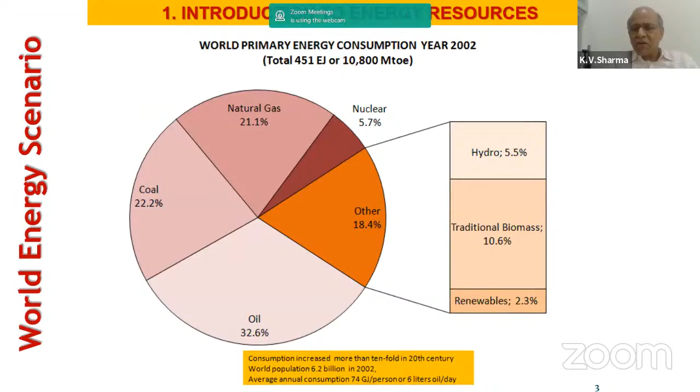The energy scenario of the world is something like this: in the total consumption pattern, renewables constitute about 2.3%, of which solar constitutes only 0.2% of world energy sources. So there is a lot of scope for the world to go in for solar, which we also know from the Government of India's plans to generate more energy from photovoltaic panels, converting solar energy into electricity.

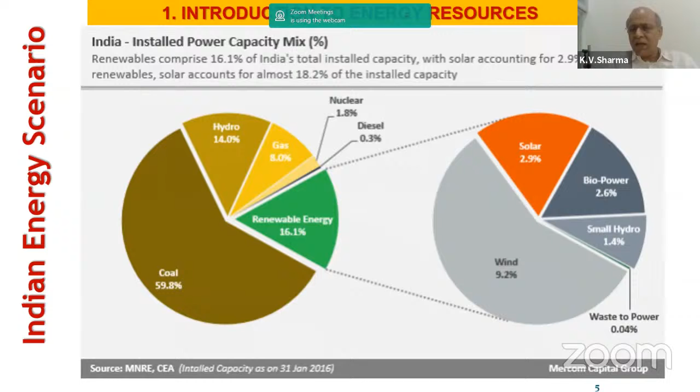Coming to India, the installed energy capacity is somewhat like this: about 60% is conventional thermal power plants, about 14% is hydro, gas constitutes about 8%, and renewables constitute about 16%, of which solar is just about 3%. So we can say that more solar energy is being utilized in India, as the renewable share from solar, about 3%, is more than that of the world.

We know the mechanism of energy conversion from the sun. The basic concept is that solar radiation falls on a simple structure called a flat plate. The energy passes through a glass cover and enters into a chamber where we have a surface, normally a good metallic surface, which absorbs the heat. That heat is transferred to the liquid flowing inside the tubes.

We see that the radiation falling enters, but from the law of heat transfer, this absorber plate, when its temperature is more than that of the ambient, naturally when it absorbs solar radiation, the plate temperature shoots up to about 100 degrees or so. Consequently there is a temperature potential between the absorber plate and the ambient, so energy is lost by the mechanisms called convection and radiation.

However, the glass plate prevents that. There is multiple reflection taking place so that more energy is absorbed by the plate and less energy is radiated back into the atmosphere. So this is an effective means by which we try to convert solar radiation into useful form.

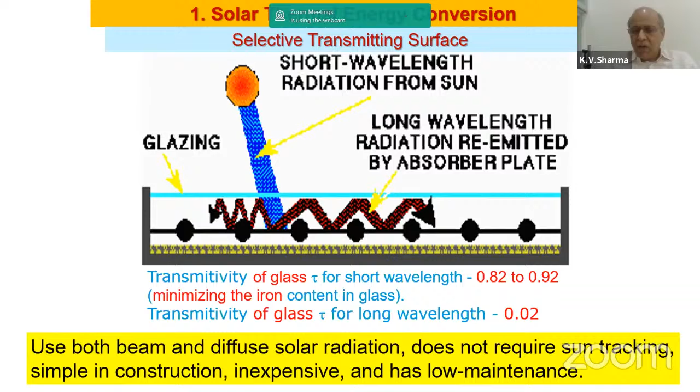So this is an important parameter which helps in the effective conversion of solar energy into heat. Further looking into the absorber plate, if it were just a copper plate, the absorptivity would be low and emissivity is also low.

However, when we go for certain special coatings on these absorber surfaces - most of us must have seen a flat plate collector, and it is generally black in color - if it is coated with lacquer, its absorptivity is very high. It has gone up from 0.05 to 0.95, so the absorptivity increases very high. However, the emissivity also radiates energy back into the atmosphere, which is not advantageous to us.

Now, when we go for black chrome, absorptivity is very high and emissivity is about 12%. But when we go for chemical vapor deposition or physical vapor deposition, PVD or CVD method of coating an absorber surface, absorptivity is very high, of the order of about 95%, and emissivity is as low as 0.05. So most flat plate collectors have such coating which helps enhance the efficiency of a flat plate collector.

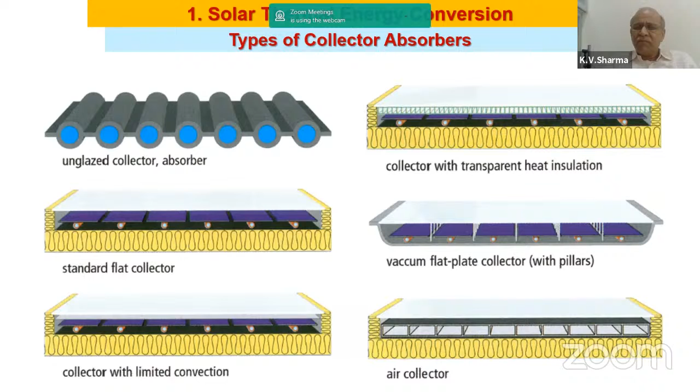As you can see here, the tube and the absorber plate are in line, but it can also be below the absorber plate. So there are various designs which people have been working with in order to see how best we can convert solar radiation into useful energy.

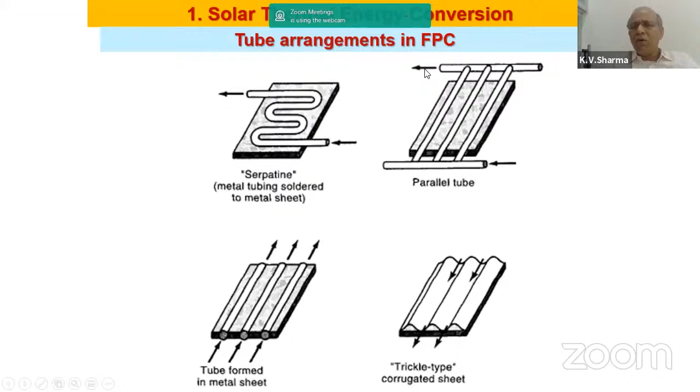So there are various designs for the tube arrangements, but normally we go in for the second type. This type is very common. We have the inlet header, the tubes rising or risers, and the outlet header. So this is the basic structure.

This is normally called the thermosiphon effect. Most of the domestic water heating systems come under this category.

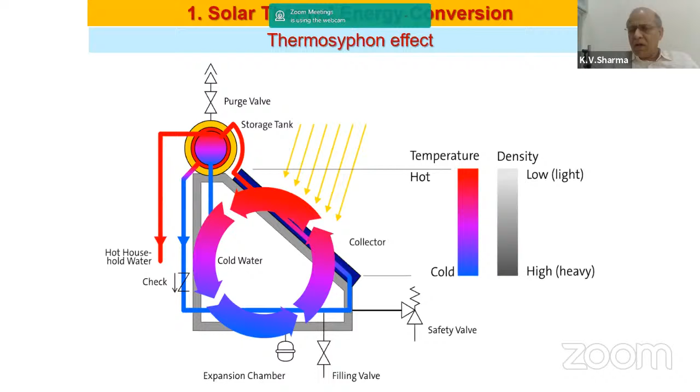So we connect it to a storage tank, and there is a continuous flow of water in such a system. This is very commonly used at homes or in colleges, because it is cheap, it doesn't require any external pump, and it doesn't require much maintenance. Hence we go in for a kind of thermosiphon system.

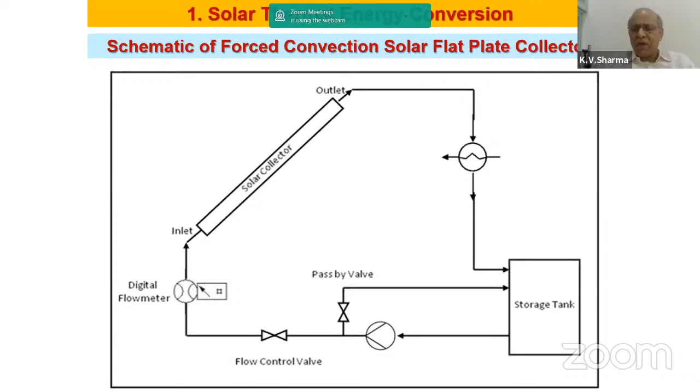So there is another type which we call an evacuated tube collector. An evacuated tube collector is a double glass layer. Between the two glass layers, as we have seen in the earlier figure, there is a gap, and this gap is not evacuated in the case of a flat plate collector. Consequently, the convection losses in a flat plate collector are as high as 13%.

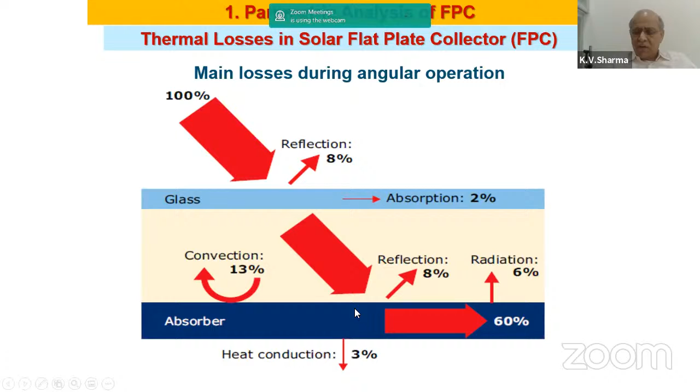However, in the case of an evacuated tube, there is a gap between the two glasses, and air is extracted, or there is vacuum between the two glass covers. Consequently, the convective loss will be minimized, and hence the efficiency of an evacuated tube collector will be higher than that of the flat plate collector. So how do we extract energy from an evacuated tube?

It has to generally be by forced circulation, because water cannot just enter a tube like this with so many bends and so many glass evacuated tubes. Consequently, we have a pump which will pump the water, generally water, into these tubes and take out the heat.

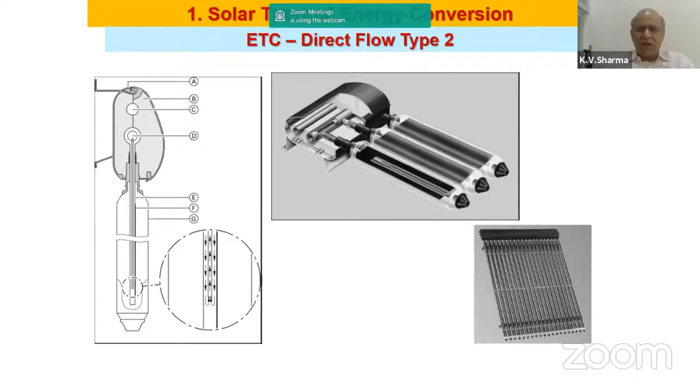So here's one more cross section, a figure which helps you understand what it is. This is an expanded view I could have shown. This is the working fluid. The cold fluid comes, absorbs the heat, becomes hot, and transfers it to the working fluid as shown here.

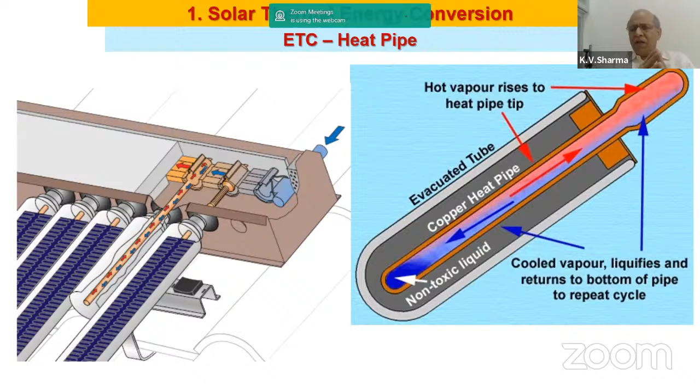There are different designs here. You can have a finned structure to this heat pipe for efficient conversion of energy. After all, our designs are meant to see how best we can convert solar radiation into useful energy.

Another type, so we have the vacuum tube, with vacuum between the two glass covers. So we have a tube which transfers it. These are just to show you that there are a large number of designs.

The difference here is that you have a metallic part, as shown here, two metallic parts, and the tubes, so that there is a transfer of energy. This is a kind of absorber plate, and this is the tube, transferring the basic concepts from a flat plate collector to an evacuated tube.

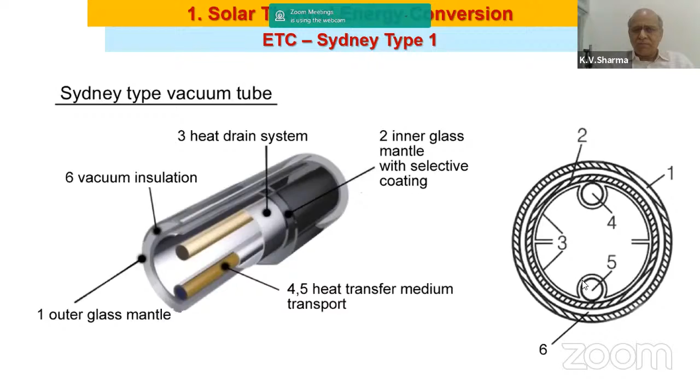Various designs as you can see here. The tube is integral with this. The liquid enters, takes the heat, and then comes out as shown here. There are different types of evacuated tubes. Here is one more, a copper tube as you can see. It can be integral, or it can be two different pieces so that it can be handled easily.

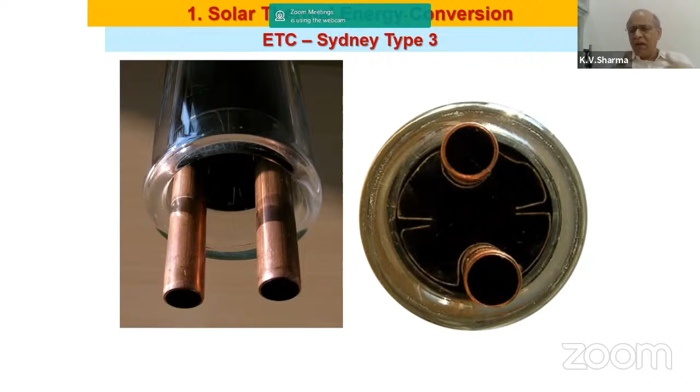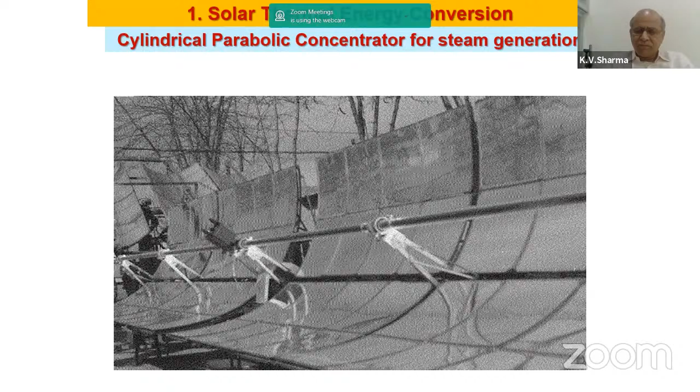So you also have, a flat plate collector is generally fixed in orientation.

However, there are other continuous tracking mechanisms in order to see that there is efficient incidence of solar radiation on the absorber plate. Normally, in the morning, or at one point when the flat plate collector is inclined, there is a perpendicular direction in which the solar radiation falls on it. But as the sun traverses, the radiation falling on this absorber plate changes angle, and hence less amount of energy is incident on it.

But if you are able to continuously move the collector, the flat plate collector or any solar energy conversion device, then the energy absorption or the energy incident on the collector will be maximum. To ensure it is maximum, we have to see that the solar radiation falls on the collector in a perpendicular direction all the time. If we are able to move it, then it is the best. Such a system is this tracking mechanism.

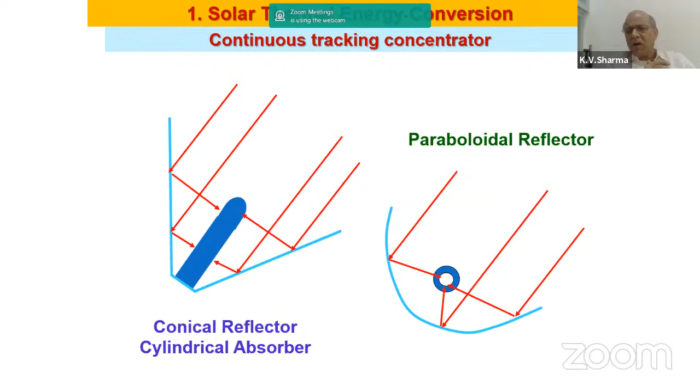There are tracking mechanisms and algorithms which will aid in continuous tracking of the sun each and every day of the year. In fact, we can write programs based on the sun-earth geometry. There are various methods of tracking it or writing such a program, but it is a different area which we are not going into further.

There is also what is called a dish type concentrator, where at the focal point we can have a cooker. I can take such a system and keep it in the sun. At this location, I can keep a cooker so as to cook food. Such systems are also available in India, and you can use it for various applications depending upon your objective.

Now we have seen different types of collectors. We initially saw a flat plate collector in detail, then the evacuated tube collector, which is also very common now. These are of different sizes, and depending upon the size, we can design the internal absorber design as we would like. We have also seen a dish type, and concentrators of different shapes, cylindrical, parabolic concentrator, and so on and so forth.

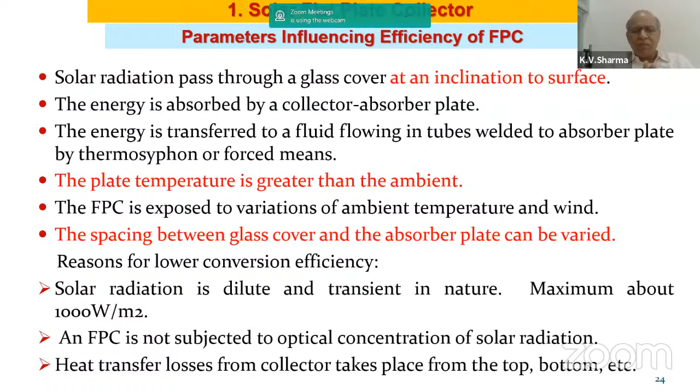Because we are having flat plate collectors on the surface of the Earth, probably we can take 1000 watt per meter square as the maximum heat flux.

Our objective is, as we see here, the flat plate collector efficiency as shown earlier in the figure is about 60%, so it varies generally between 30 to 60%. Naturally, as engineers, we would like to see how best we can enhance this efficiency.

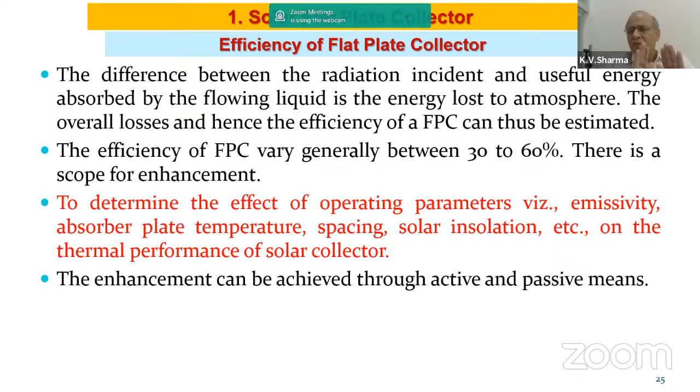The efficiency of an evacuated tube collector generally lies at about 80%. So there is still a certain possibility for enhancement of the efficiency of an evacuated tube collector also. For today's presentation, I would like to limit myself to the analysis of a flat plate collector.

As stated, we have selective coatings on the absorber plate, which has high absorptance of about 0.95, low emittance of about 0.05. We have the option to go for a single cover, which is normally what we have in the market, or we can also increase the number of covers to 2.

The spacing between the absorber plate and the glass cover can be varied. However, the Ministry of New and Renewable Energy has given certain guidelines, which is about 2.5 cm or 25 mm.

So if we can think of having 2 glass covers, the losses will decrease. On one side, the losses decrease, and on the other side, the solar insolation or the energy passing through the 2 glass covers and reaching the absorber plate decreases. So there is a trade-off between the amount of energy entering and the amount of energy leaving as losses if we were to have more number of covers.

Also, the gap between the absorber plate and the glass cover can be varied. Tilt is another thing, or slope, as we call it. This also varies. In summers we would like to have it as flat as possible, as horizontal as possible. In winter we would like to have an inclination.

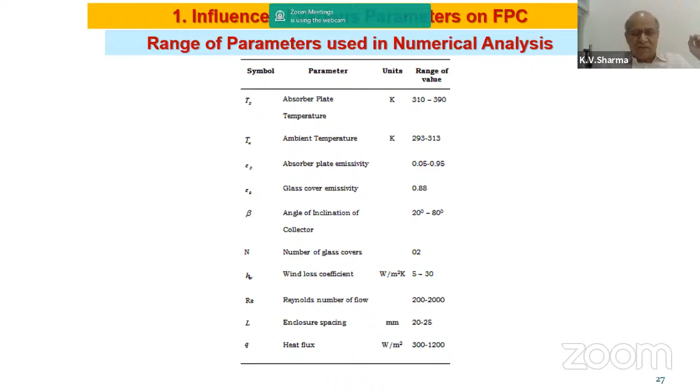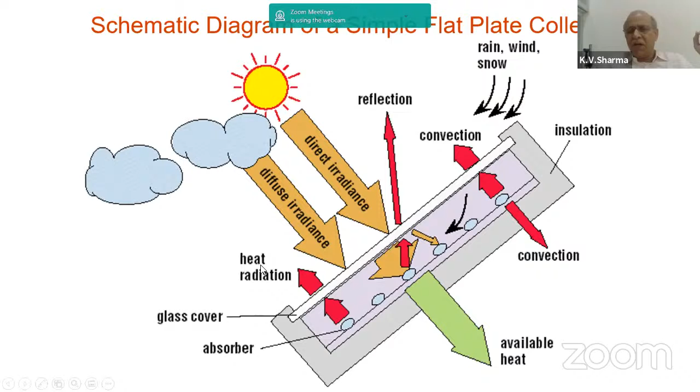So this is the program that has been written in Fortran.

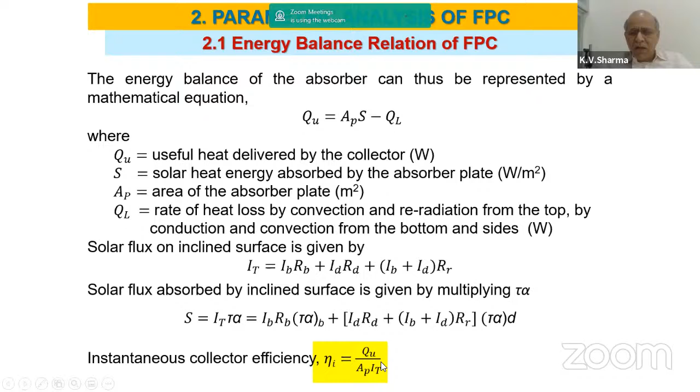The basic energy balance is quite simple. The useful energy is equal to the amount of energy absorbed by the plate minus the losses. So if I can minimize the losses, I can enhance the useful energy and consequently the efficiency of the system. That is the objective, and this we observe.

Without going much into this, I would like to dwell upon the results from the numerical program that we have. We have what is called the wind heat transfer coefficient due to wind. I have varied the wind heat transfer coefficient between these two, and I have kept the glass emissivity constant as shown earlier. The plate emissivity is 0.05, meaning it is a very efficient system, a very good value.

The slope beta is 20 degrees. The number of glass covers is 1. The ambient temperature is 303 Kelvin. Since we are dealing with radiation, I have the temperature always in absolute temperature scale.

I have varied the absorber plate temperature. If the distance between the absorber plate and the glass cover is 0.025, I varied the plate temperature and was able to get the glass cover temperature by running the program. We see that if the space is 2.5 centimeters, it is lower compared to 5 centimeters.

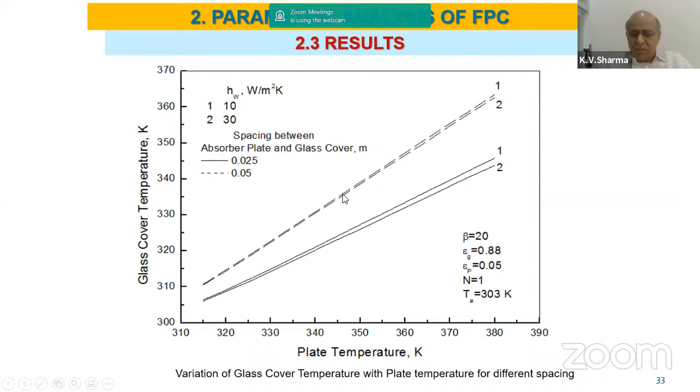It is once again a similar one. I have the absorber plate temperature here and the glass cover temperature here. The absorber plate temperature will always be higher than the glass cover temperature. I have shown it for two emissivities: 0.1 and 0.95. Naturally, if the emissivity is low, the losses from the top, which we call the top loss coefficient, are very low. Generally, the loss coefficient varies from about 3 to 3.5.

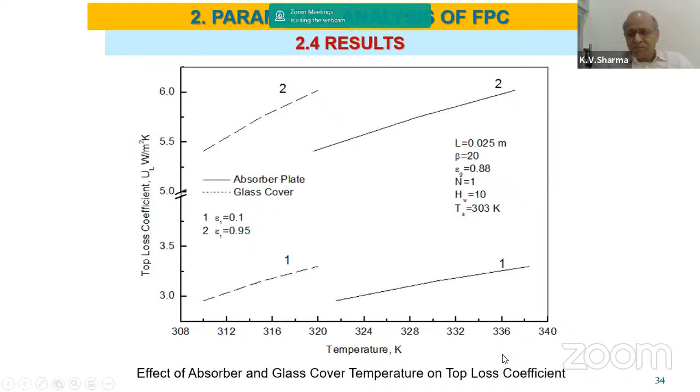However, if the plate temperature varies—if the plate temperature is low, the top loss coefficient is low. If the plate temperature is high, the potential between the plate and the ambient increases, and consequently the losses also increase.

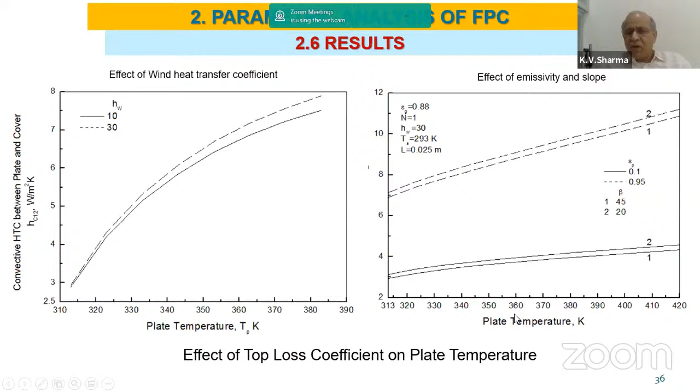Here I show the effect of emissivity. I don't know whether you are able to see it, but like this, we do a large number of parameters.

Here, the emissivity of the plate—if the emissivity varies from 0.1 to 0.9, we see that the top loss coefficient increases from 3.5 to 6, almost coming to double.

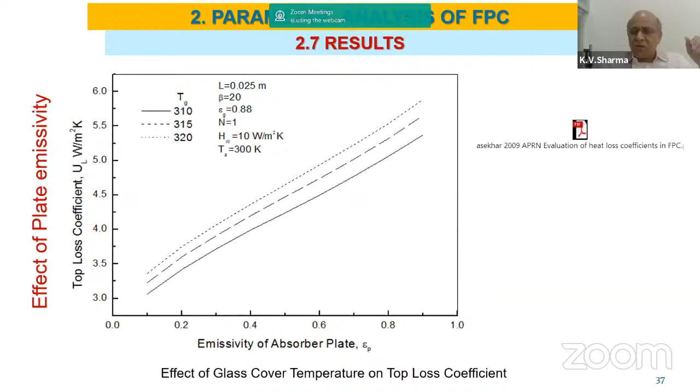So this is, what is the impact of the plate emissivity on the top loss coefficient? When I do a particular analysis, it is quite evident whether my program is correct or not. I am getting some results, but I do not know whether my program is reflecting the true nature of a collector, so for which I have taken the experimental data of one of the authors available in the literature.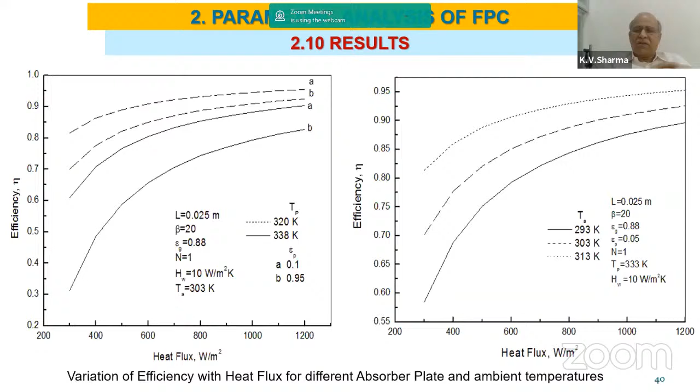Here also I have the effect of ambient temperature on the performance. Then, with the tilt angle, how the efficiency varies. As we have seen earlier, the effect of tilt angle is not that significant. However, when the heat flux increases, the efficiency is found to increase.

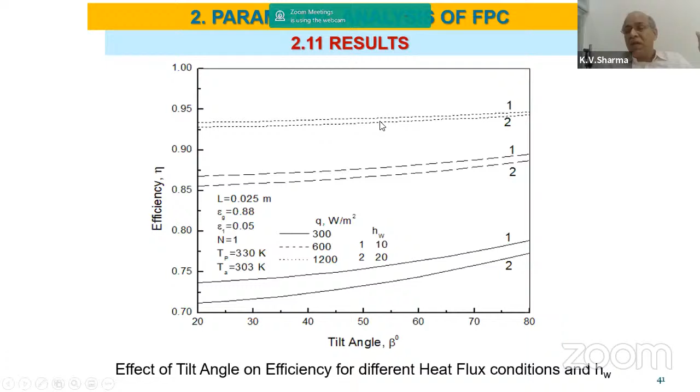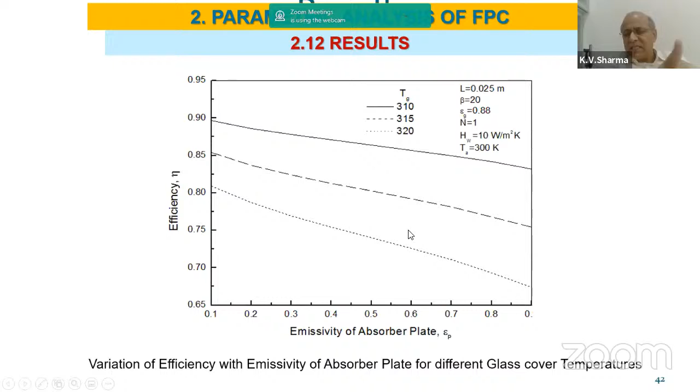Once again, the emissivity of the absorber plate. For different emissivities I have plotted, when I change the glass temperature on top, if the glass temperature is low, the efficiency is high. If the glass temperature is high, the efficiency comes down. This is how it is varying for different emissivities of the absorber plate.

So why is the plate temperature increasing? It is increasing because we are not able to extract the energy absorbed by the absorber plate and transfer it to the working fluid, water. If we don't extract it, naturally the plate temperature increases. So how do we reduce the plate temperature, the absorber plate temperature, in a flat plate collector? That is the objective with which we will move into the second part of our discussion, which we call nanofluids.

Normally, the working fluid that we use is water. Water is cheap and commonly used to extract heat. In certain applications, we also have ethylene glycol, engine oil, and so on, depending upon the nature of application. These are used to extract heat or transfer heat from one surface to another.

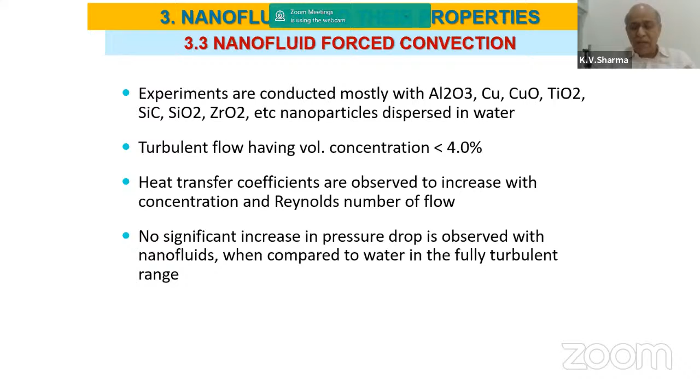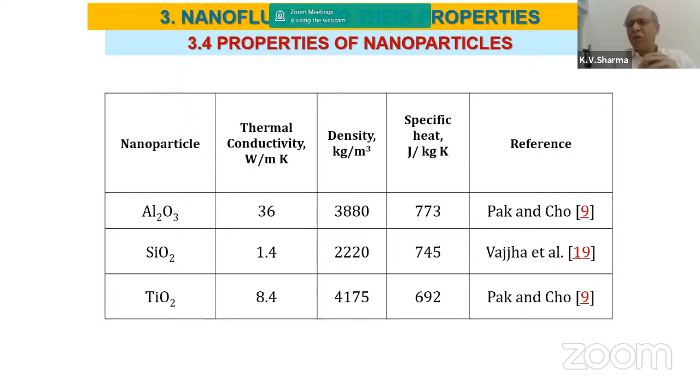So various people have done it, and these are some of the properties that we can make use of. For today's presentation, I would like to dwell upon basically TiO2, titanium, and silica. These are the two nanoparticles with which these people have worked, and they have given the properties.

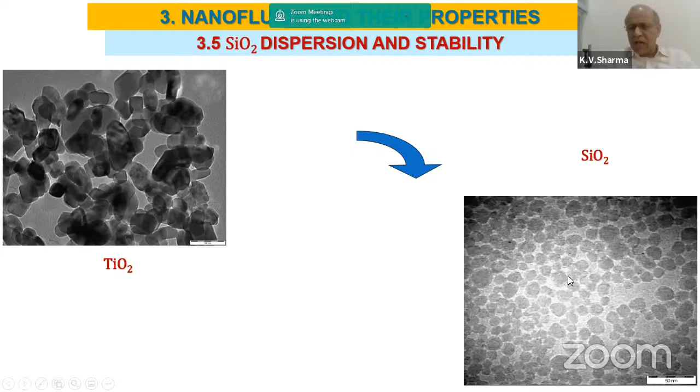So this one is of TiO2 and this one is of SiO2. For silica, to get the image is difficult, and hence we have it in this manner.

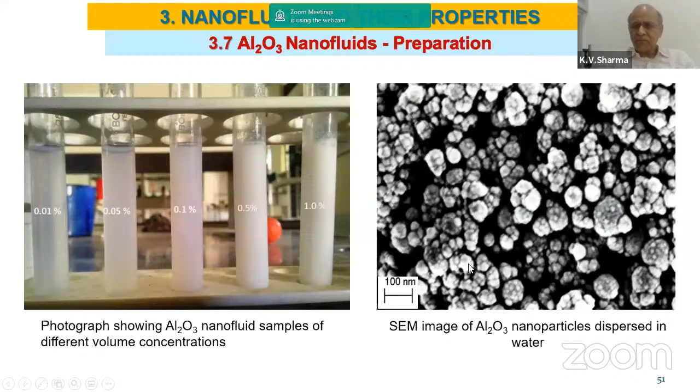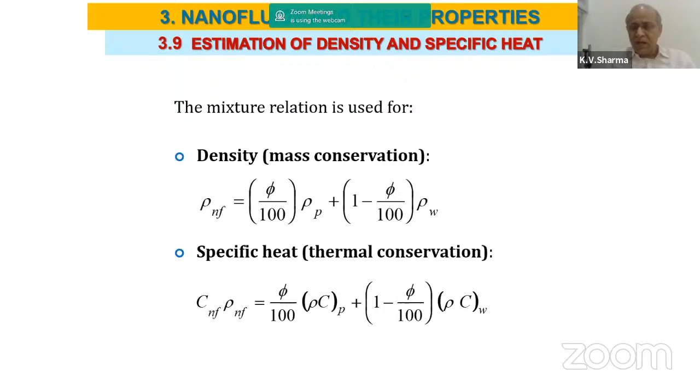But however, when we come to the thermal conductivity of nanofluids, we have to conduct a large number of experiments. Various people have conducted experiments and presented the properties in journals.

Yes. Any question being asked? Okay.

So I have taken a large amount of data which has been presented by various authors working with different materials, different particle sizes, different operating temperatures, different concentrations. So I can vary the concentration, I can vary the temperature, I can vary the particle size, I can vary the material. There are 4 parameters involved when we try to determine the thermal conductivity.

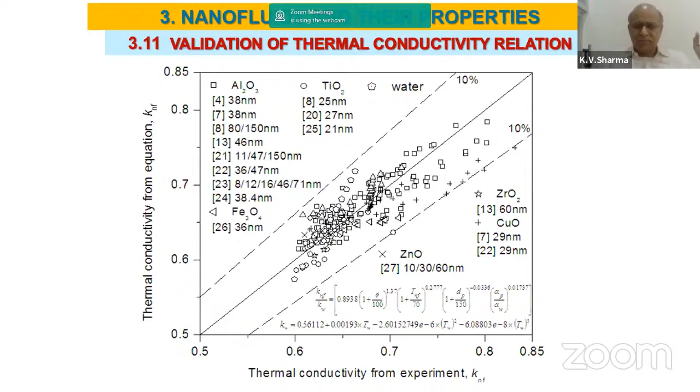I have made use of the Brookfield viscometer and determined the viscosity. That data from a large number of people has been subjected to regression. Once again, as concentration increases, viscosity increases. As we know, concentration is proportional to the amount of nanoparticles in the liquid, so as it increases, viscosity increases.

As the temperature increases, viscosity decreases. We know that viscosity decreases with temperature. Rightly, the negative sign reflects that. So I can say that this equation reflects the true nature of viscosity.

And if the particle size increases, the viscosity decreases. So for a particular concentration, if the particle size increases, the number of particles will be lower, and hence viscosity decreases. This equation is valid for all nanofluids, where C has a value of 1, but only for SiC, silicon carbide, it is found to be 1.4. So please note that this equation can be used only for water-based nanofluids, not for all.

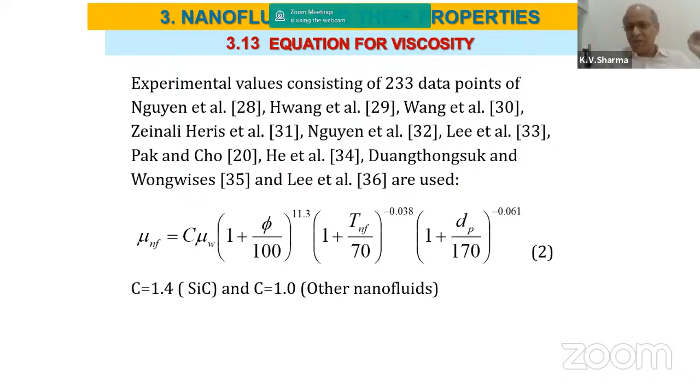So once again, checking the reliability of the equation, which we call the parity graph, same axis on x and y for the same scale. When we plot it, we see that the deviation is within about 10%.

Now I have with me all the properties that are required. Making use of the properties, I determine the objective. What is the objective we have here? To know what is its impact on the surface temperature. If I were to have water, what will be the surface temperature? If I make use of a nanofluid, how will the surface temperature be? Is it going to increase? Is it going to decrease?

Rightly, we can say that since the thermal conductivity of a nanofluid increases, we expect the absorber plate temperature to decrease as we have nanofluid flowing through these tubes. Let us see how much it is, what parameters it depends on. Let us go in detail a bit.

There are other ways also to enhance the heat flow. One is what is called a twisted tape. I have a tube through which I can allow the liquid, either water or nanofluid, to flow through. Also, I can have a twisted tape. So I have a tape, a strip, on the lathe at equal intervals, and I make a twist of 180 degrees. Thereby, we call this a twisted tape.

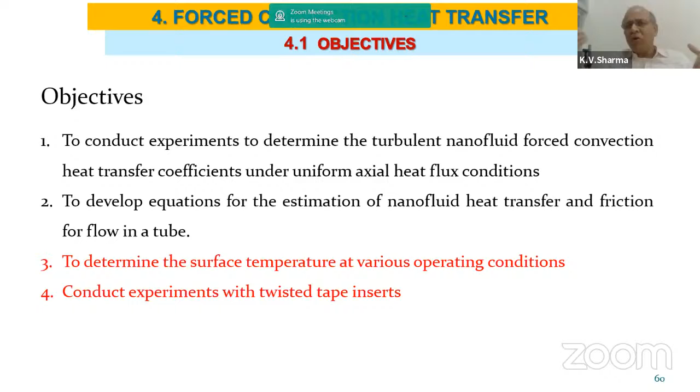So I take this tape and insert it into the tube, by which I will be able to enhance the heat transfer coefficient. If the heat transfer coefficient increases, we know that more energy is transferred to the fluid, and consequently the wall temperature can decrease.

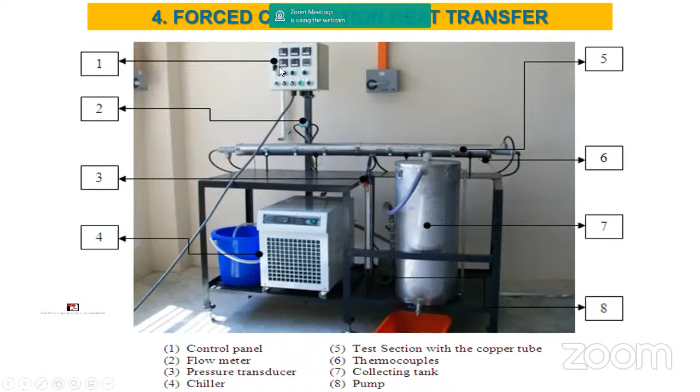So I have the experimental setup. There is a facility for me to remove this part and insert the twisted tape inside the tube for this length. I have a chiller, a storage tank, and this constitutes the setup. I have equipment to determine the pressure drop across the length of the tube, and I also have thermocouples here, which are all sent to a data logger.

So I have a console which will show me the pressure drop and the temperatures at different locations. Also, I have a thermocouple measuring the inlet and outlet temperature. So this is an experimental setup. You can either make use of this, or in your college you should be having a double pipe heat exchanger or U-tube heat exchanger, so you can also convert such experiments making use of this technology.

In fact, a PhD work is going on making use of something simple, we need not go for very complicated setups. You have to understand the physics of the problem, make an energy balance, and then equate it. So getting a PhD by doing experiments, only thing is you need patience, clarity of understanding, and you need to conduct the experiment by spending a large amount of time. Then you get wonderful work wherever you are.

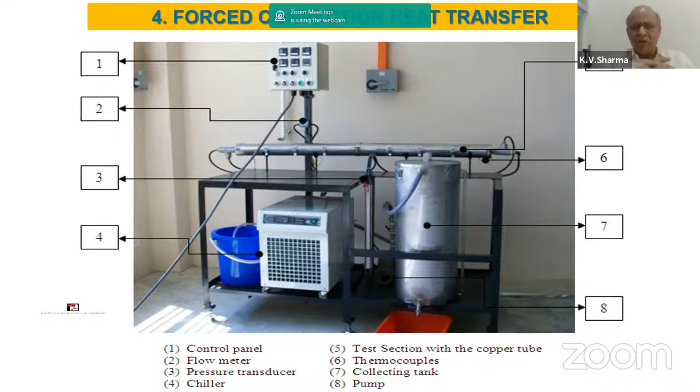So here is a schematic diagram, this is what I call a twisted tape, and this tape can be inserted inside here, inside the copper tube, over which I have insulation. This is a forced convection apparatus, I need not call it very specific. Only thing is I have temperature indicators and sophisticated instrumentation, which enhances the cost of the experimental setup.

So these are the parameters. I have given 600 watts. I can control the average temperature of the fluid at the inlet and outlet to about 30 degrees centigrade with a deviation of about 1 degree centigrade. So that facility, temperature setting, you can set the temperature and then run the experiment. I also have a data logger which will measure the surface and fluid temperatures every 5 seconds and store the data so that I can know whether the system has come to steady state or not.

So these are some of the parameters that I measure: flow rate of the working fluid, pressure drop across the length, and the temperatures, including the inlet and outlet temperature, for the estimation of energy balance.

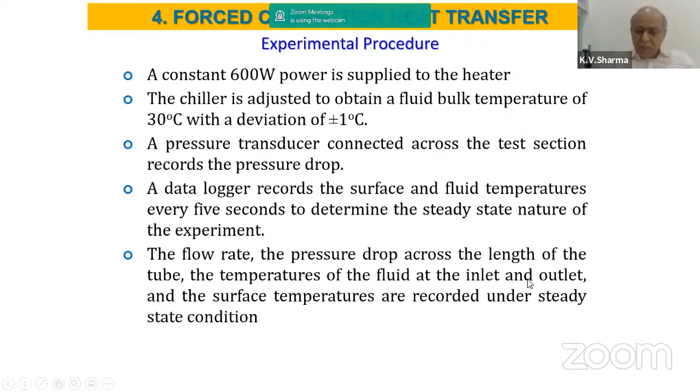This study involves simply 4 equations, which all of you are aware of. I am using electrical energy to heat the working fluid. I know from Newton's law of cooling that this is the energy by which I can estimate the heat transfer coefficient experimentally. I also know a non-dimensional parameter called the Nusselt number, which is defined in this way. I can measure the friction factor using the pressure drop from this equation, which we call Darcy's equation.

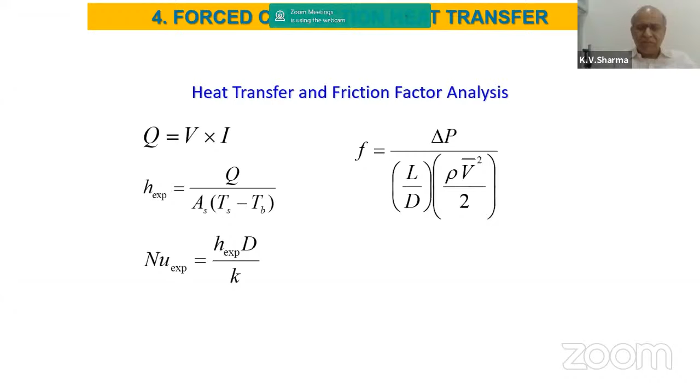So I conducted it with water to see the reliability of the experimental setup. I find that it is in good agreement with the various equations available in literature in the turbulent range of Reynolds number. For turbulent range, since I conducted in that range, I have made use of this equation. If it were laminar range, naturally you have to make use of 64 by Re as the equation, depending upon the range.

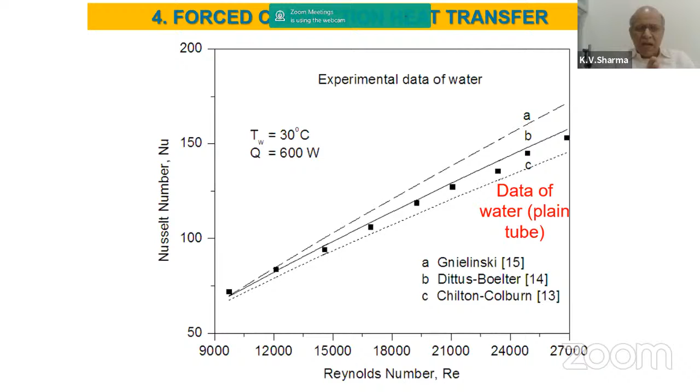Then I try to analyze making use of the data. I have increased the concentration from 0.5 to 3%, and also shown the base liquid. These dark squares represent water, and as I increase the concentration, I see that it is increasing up to 1%, but as I go to 1.5%, it has come down. Please note that I have done all these experiments at the bulk temperature, or average temperature, of the nanofluid set at 30 degrees centigrade. So if the average temperature of the working fluid is 30, this is the outcome.

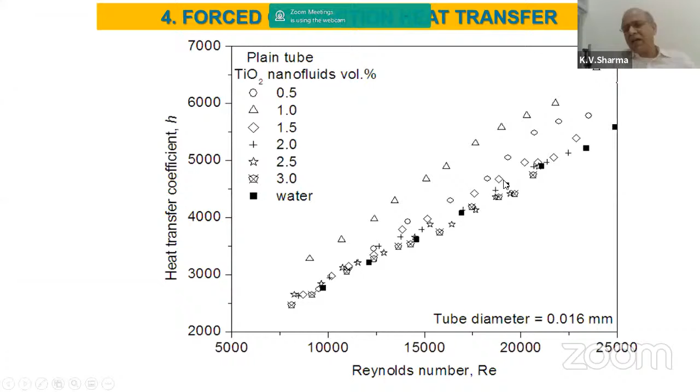Normally, we have a feeling that if I go on adding nanoparticles, as concentration increases, heat transfer will keep increasing. No, it is not the case. It also depends upon the working fluid temperature. In this case, at 30 degrees, you see that 1% concentration of TiO2 has given higher, or the maximum, heat transfer when compared to higher concentrations of 2, 3, up to 3%.

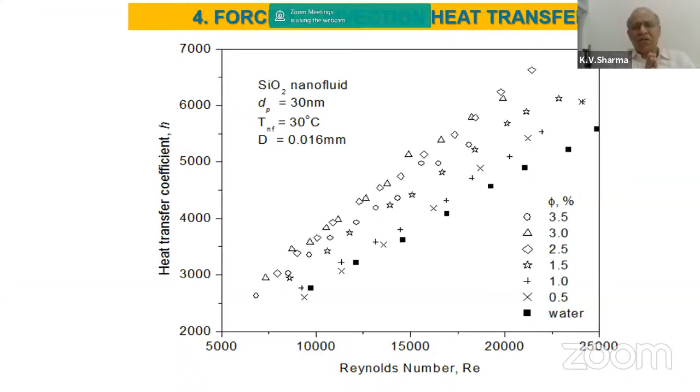Coming to SiO2, in a similar way, when I increase it from 0.5 up to 3%, the 3% concentration, shown by triangles, gives the maximum heat transfer coefficient. So once again at the same temperature of 30 degrees centigrade, when I change to SiO2, the 3% concentration shows the heat transfer coefficient to be maximum. For TiO2, it is 1%. For SiO2, it is 3%.

For turbulent flow, the property enhancement ratio is defined as the enhancement in viscosity ratio to the enhancement in thermal conductivity ratio. If it is less than 5, enhancements in heat transfer take place. But if it is more than 5, it is not advantageous for us to go for higher concentrations, since it depends upon the working temperature of the fluid. In this case, it is 30.

So some more plots for 0.5%, showing the same thing in a comparative manner. For 0.5% concentration, I have now shown for TiO2 and SiO2.

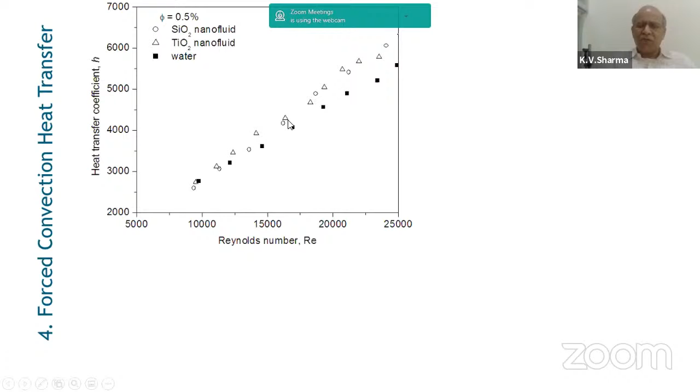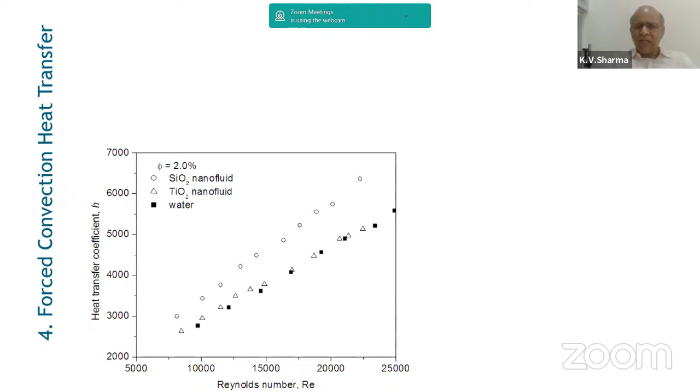When I go for 1%, TiO2 has come to a maximum, whereas SiO2 is still trying to go up. But when I go for 2%, now SiO2 has come up, circles. When I come to 3%, SiO2 has reached its maximum, whereas TiO2 is very close to that of water.

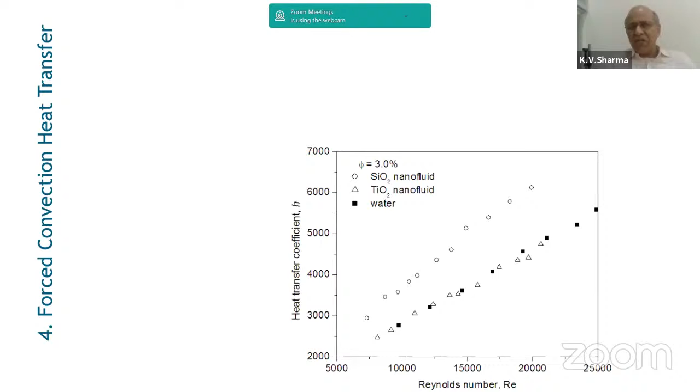So it is not advantageous always to go on adding nanoparticles or increasing the concentration just like that. We have to have clarity as to why we are adding, when we should add, up to what conditions this heat transfer gets enhanced.

Similarly, for TiO2, we see that at 1%, it gets a maximum enhancement of about 24%, whereas SiO2 at 3% gives a maximum enhancement of 33%.

Now coming to twisted tape, we know what a twisted tape looks like. All of you can manufacture twisted tapes in the workshop. Take a small aluminum strip of width equal to the inner diameter of the tube with which you are working, with thickness not more than 1 mm.

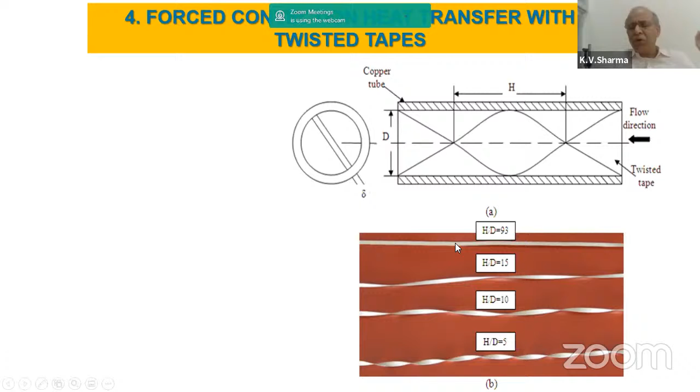This makes it easy for you to twist it and get twist ratios of 5. If the twist ratio is small, it looks like this. If the twist ratio is large, it will be something like a flat strip, close to that of a plain tube flow. So when I have it, I insert it here and get the results.

So I compare it with water for different twist ratios. This is in a plain tube and this is in twisted tape.

Now I go for TiO2, and the reason why I have shown this figure is that normally when we do something, we have to compare with the equations available in the literature to show the validity of our experimental data. If it doesn't come into that, then the reliability of the experimental data is questionable.

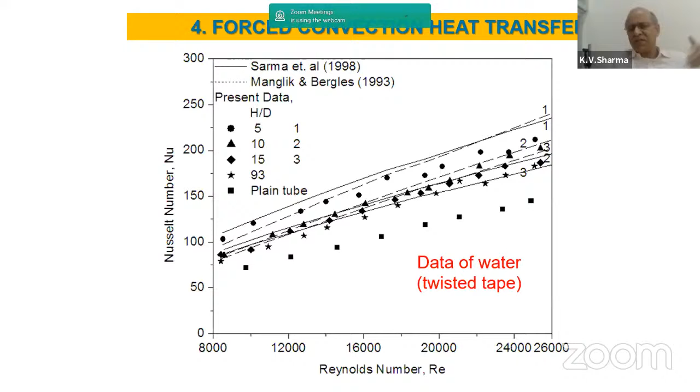So for water, after doing it and finding that it is in good agreement with two different equations, now I have reliability in my experimental data with nanofluid.

Similarly, I conduct it for various flow rates for TiO2 at 1.5%, for different H by D ratio.

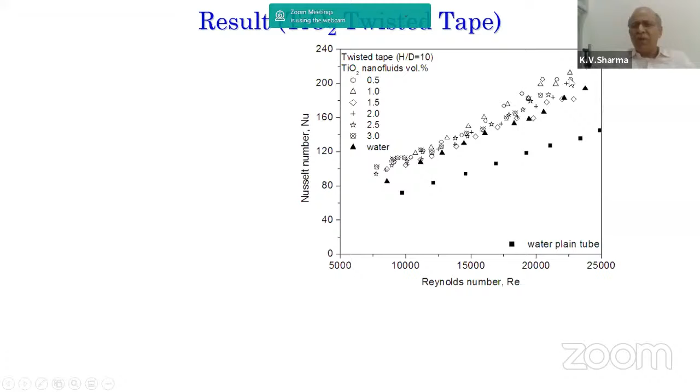When twist ratio has been increased to 10, the spacing increases and consequently heat transfer coefficient decreases. So the values have come down a bit when compared to the earlier one.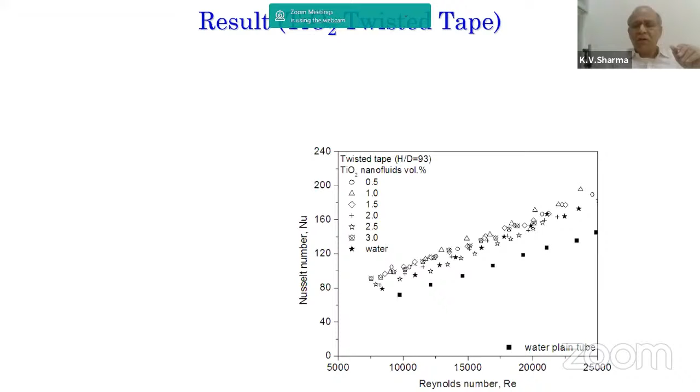So when it goes to 93, that means I have just introduced a strip which doesn't allow the water to get churned, and the water just flows like that. However, there is still a strip, so you have the heat transfer coefficients coming further down.

So like this, we start analyzing to see how best we can reduce the temperature of a flat plate collector.

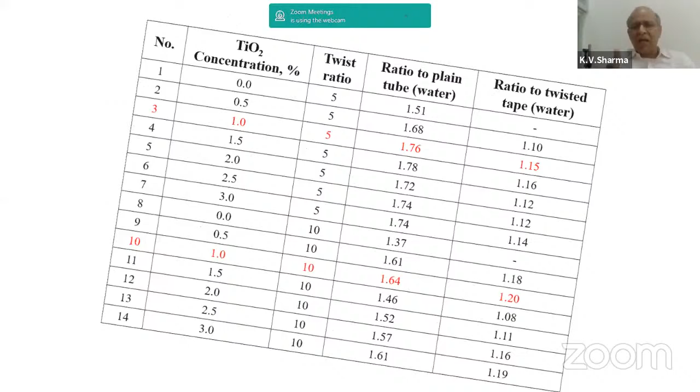So doing a similar analysis, just as we have done it for a plain tube, we can go for a twisted tape. We find that with the twisted tape, for TiO2 at 1% concentration, with the twist ratio of 5, the enhancement is 76%.

However, for the same concentration, when the twist ratio is increased from 5 to 10, the enhancement has come down to 64%.

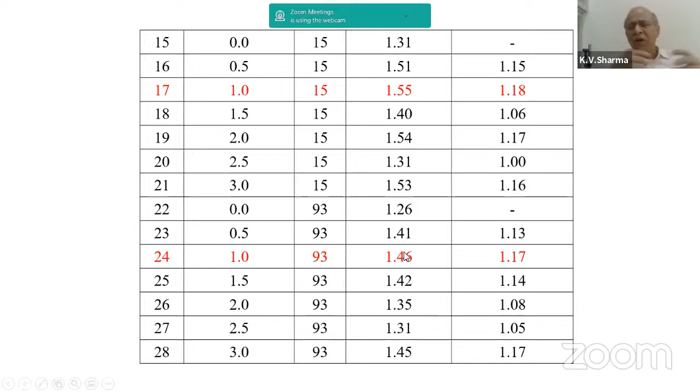Like that for 15 and 93, as you can see the red colored numbers are coming down because it is becoming more and more very close to that of a plain tube.

For SiO2, once again, similar analysis.

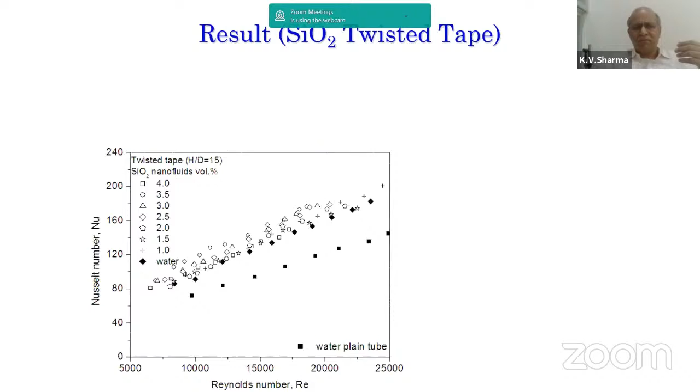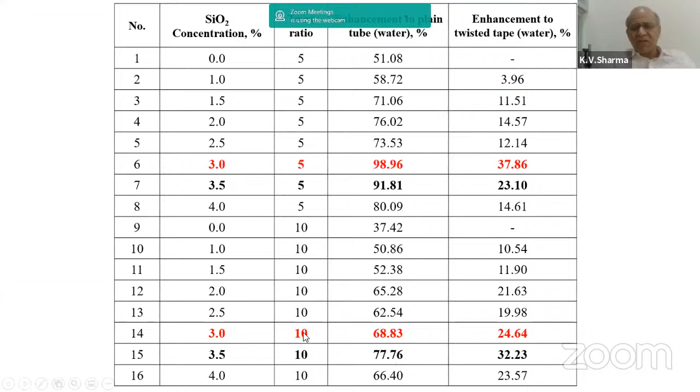Taking the data and putting it in a tabular form, you see that for 3% concentration for SiO2, for H by D, you get a maximum enhancement of 98.96%. When it has increased from 5 to 10, the H by D ratio, it has decreased.

So further, when we go for this, we try to have the data. Now I'm confident with my data for nanofluid. I have reliable data and that data is valid.

Now I would like to go to the friction factor. As seen here, the friction factor is not as high compared to that of the base liquid, water. For different concentrations, the maximum increase is about 20%.

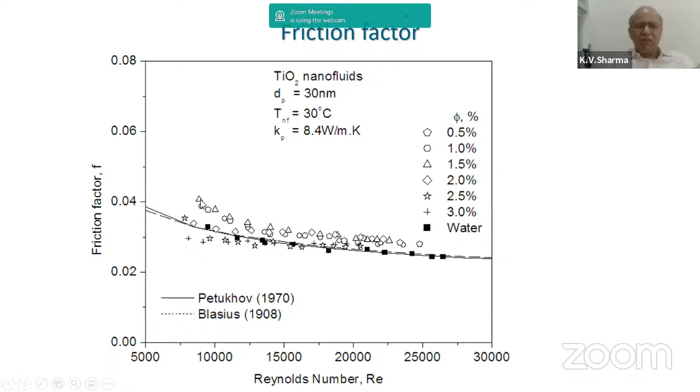For SiO2, the friction factor behaves in this manner. One thing you can observe is that all this data is slowly coming close to the line of the Blasius equation.

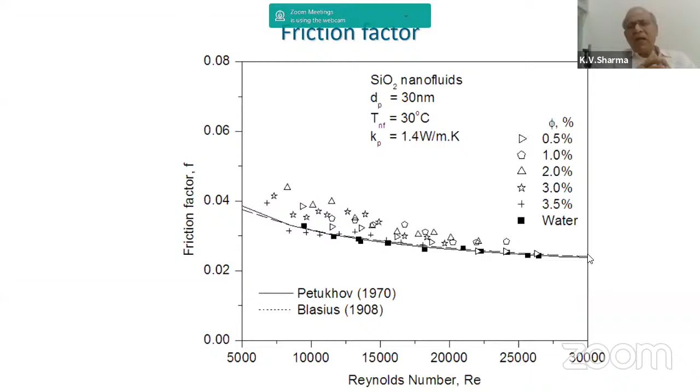This indicates that as you increase the Reynolds number, it will fall closer to the Blasius equation, meaning the nanofluid concentration does not have a significant impact on the pressure drop.

So I don't want the flat plate collector temperature to shoot up. I always want to extract heat so that the plate temperature is kept as low as possible.

If I want to decrease the wall temperature, I have to extract heat quickly. To extract this heat, I make use of nanofluid, either in the forced convection mode or in the free convection mode, so people have to conduct experiments.

People have been doing it and have shown a lot, but such a numerical analysis has not been presented until now, to the best of my knowledge.

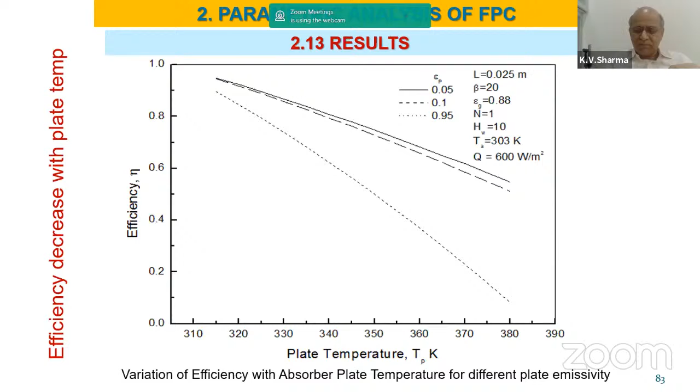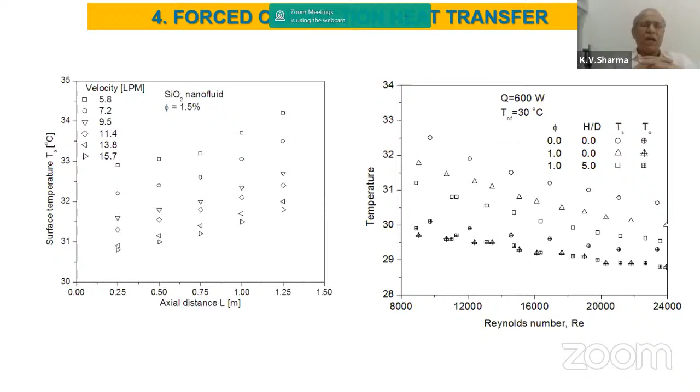Ultimately, by the use of nanofluids, you will be able to decrease the wall temperature significantly, whatever the flow rate, compared to base liquids such as water.

The only difficulty here is that, since you are using a nanofluid, you cannot allow it to go into the mainstream. Consequently, you require a heat exchanger.

So the nanofluid goes into this spiral tube in the storage tank, and once again this liquid is circulated, transferring energy from the nanofluid flowing inside this tube to the useful water.

This is the water you wanted to heat. So you require an indirect heating system if you are to work with a nanofluid.

Those interested in doing experiments can work in this manner. This has been taken from an ANSYS diagram, or you can look at such a heat exchanger on YouTube.

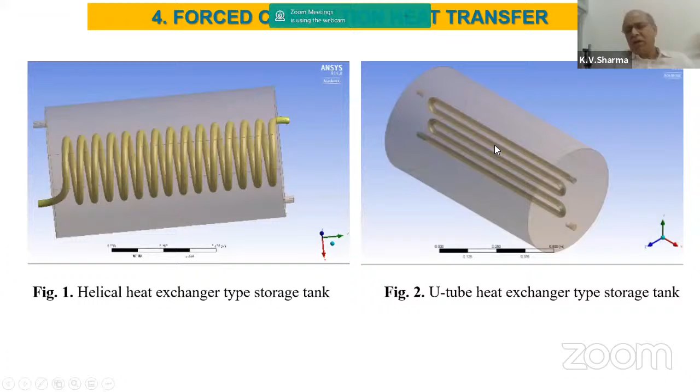This is for transferring the energy associated with the nanofluid to the working fluid.

So I have explained to you in detail how the energy can be utilized and how the energy losses can be reduced.

You can identify the various parameters that influence the efficient working of a flat plate collector, which can be extended to various other types of collectors.

I have explained what is meant by nanofluid. How to prepare a nanofluid has not been detailed here, but those interested can ask me questions so that I can explain better.

Some of the salient summary points from the work done are presented here. I have explained these in detail, and they are summarized—this earlier part is for the flat plate collector, the new parametric analysis.

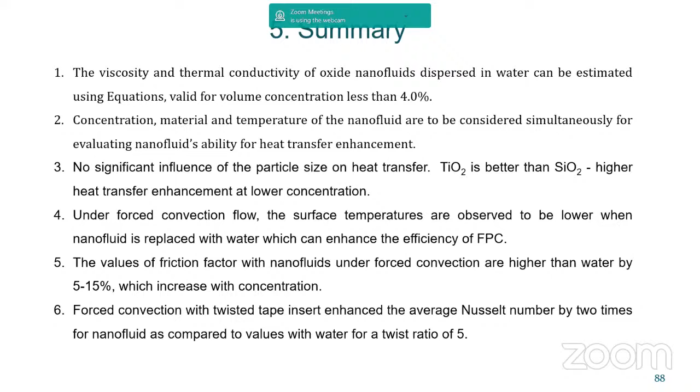This is a summary for nanofluids and their flow through a plain tube as well as with a twisted tape insert.